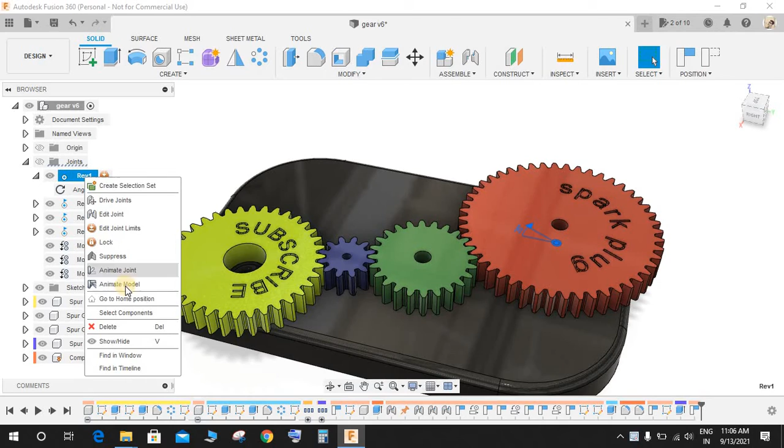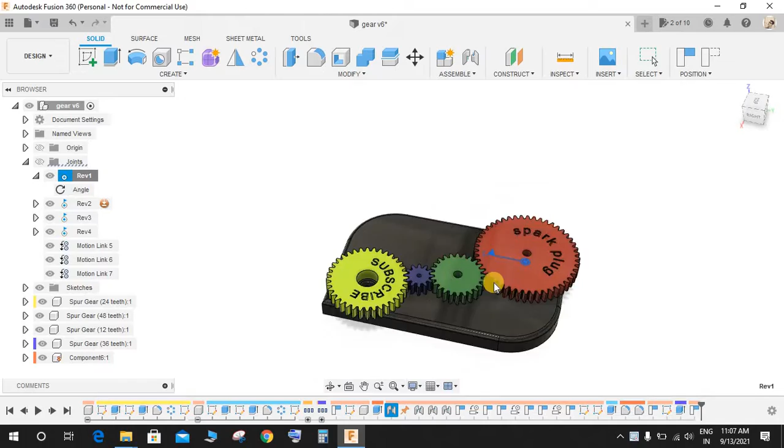So in this video tutorial I will be showing you how to make this beautiful gear train assembly in Fusion 360. This video is not going to take very long. I will be constructing these gears using scripts pre-installed with Fusion 360, and I will be showing you how to make this assembly and how to make joints between these gears so that they move beautifully without any intersection. As you can see, no two teeth are colliding with each other.

So everything is running beautifully. Let me just slowly show you. As you can see, everything is moving beautifully. Hope you will enjoy. Let's get started without wasting any time.

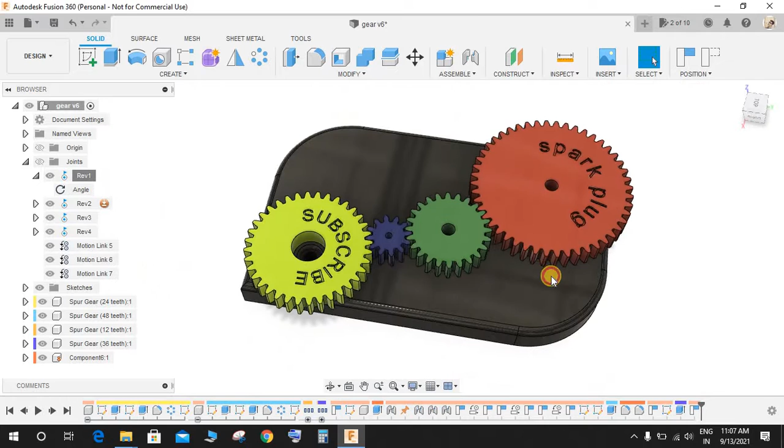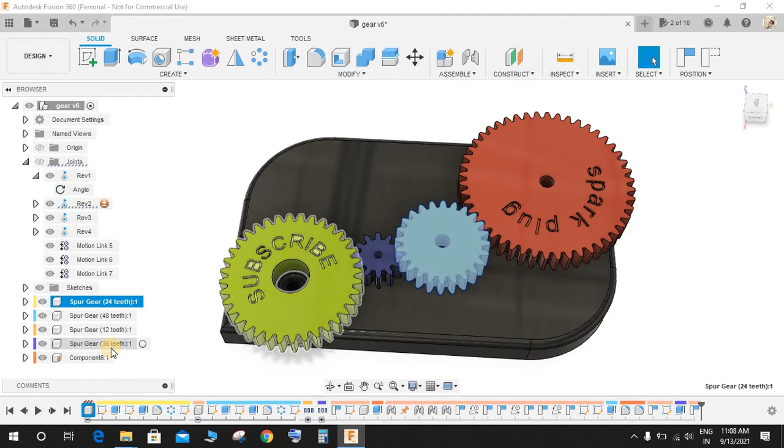Again, this is going to be a tips and tricks video, so I'm not considering any exact dimensions. I'm just showing you how to make a simple gear train and animate this assembly. I am going to create 4 gears: one with 48 teeth, a smaller one with half of it, 24, then 12, and one with 36 teeth. You can assemble any one after that, it doesn't matter. I will show you how to do this and the tricks beyond that.

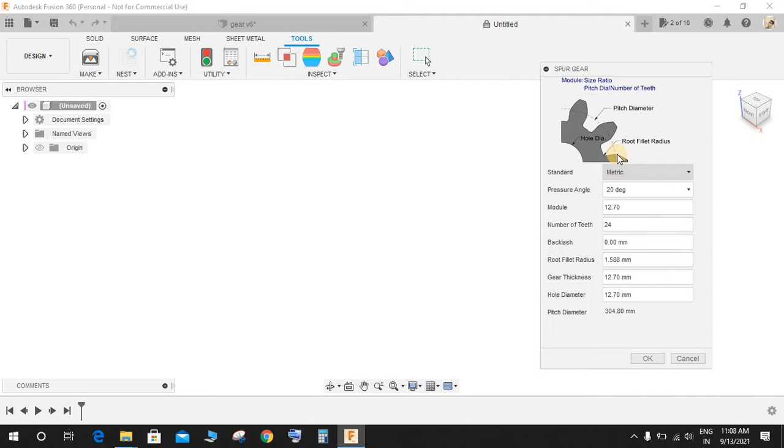So let's go to a new design and go to Tools, and here you have the option for Add-Ins, Scripts and Add-Ins. Click on that, scroll downwards, and we have an option for Spur Gear. Click on the yellow icon and click Run. Now it will ask you about the standard; remain in metric pitch. Here it represents the hole diameter, the root fillet radius and the pitch diameter. Always focus on your pitch diameter, as this is a necessary element when combining two gears and making an assembly.

The first gear I am going to make will have 48 teeth. Module is the ratio of pitch diameter divided by number of teeth. So we have pitch diameter, module and number of teeth here. The pitch diameter is number of teeth multiplied by module. I'm going to make the module 5, so the pitch diameter of the first gear is going to be 240 mm. The rest is okay.

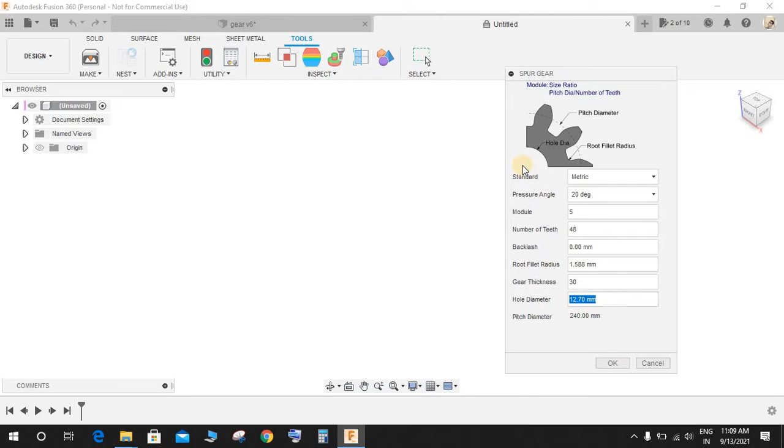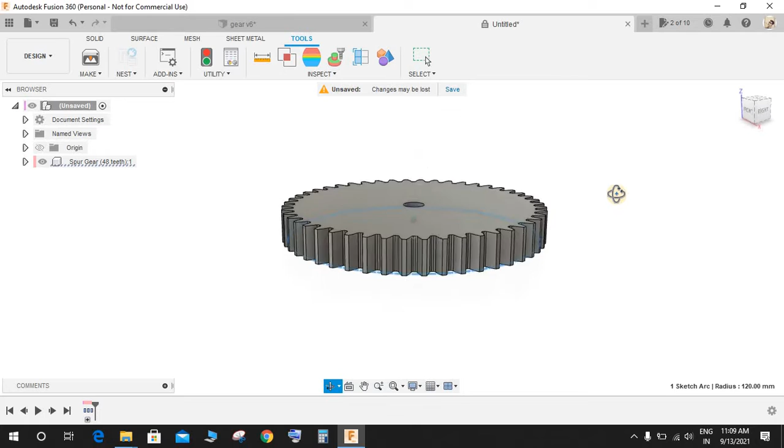Make the gear thickness 30 mm, and the hole diameter at the center, you don't have to do anything, but let's make it 20. Now we have a pitch diameter of 240 mm. Press OK and wait for your system to respond; it will take a few seconds to compute, and here is our gear. You can see the dotted line; if I measure it, the diameter is 240. This represents our pitch circle.

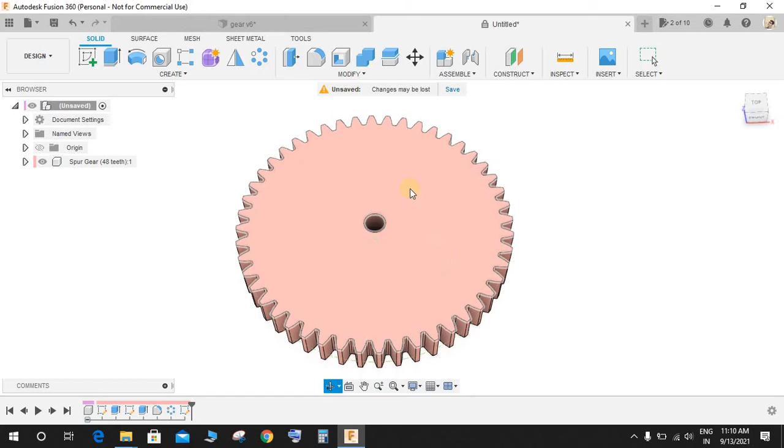Now let me press Shift and N to enable the component colors. If I go to history, you can see this is a pre-made gear but the history is there. You can edit the history anytime. Now I am going to repeat the same and make another gear of module 5, and this time the number of teeth will be 24. The rest will be the same.

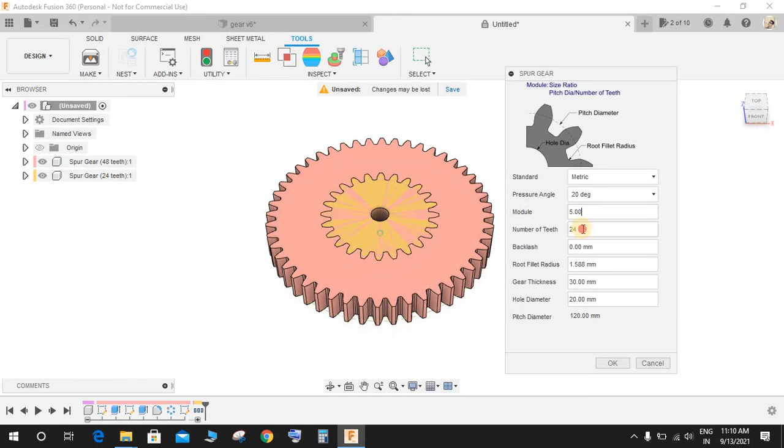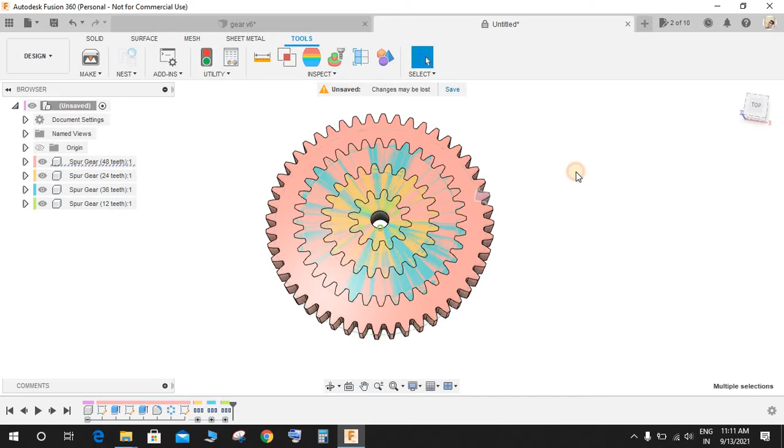Now repeat the same step again. This time the number of teeth will be 36. Press OK. Now we have our third gear. Again repeat the same step, run, and this time the number of teeth will be 12, and press OK. Now we have 4 different gears of different sizes. If I drag them, we have 1, 2, 3, and 4.

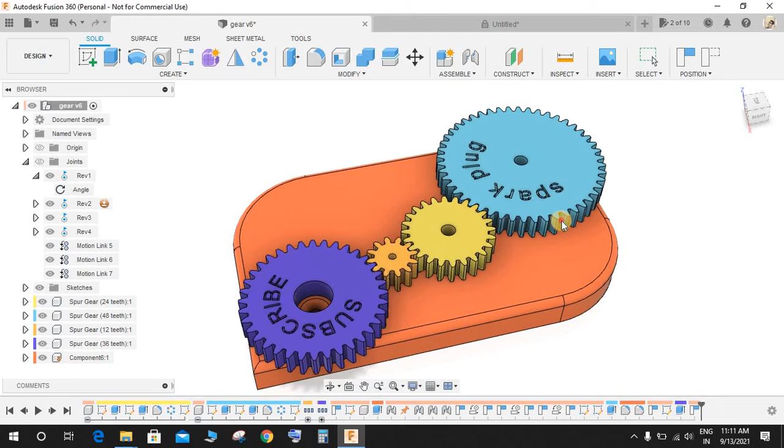Once done, I'm going to show you how to make this assembly. Before making any assembly, there needs to be a component that is grounded. The assembly cannot work unless the gears are mounted on something. So I have created this box here just to make it a grounded part, and each gear is assembled on this hole. You could use screws to assemble that, but Fusion 360 doesn't require that.

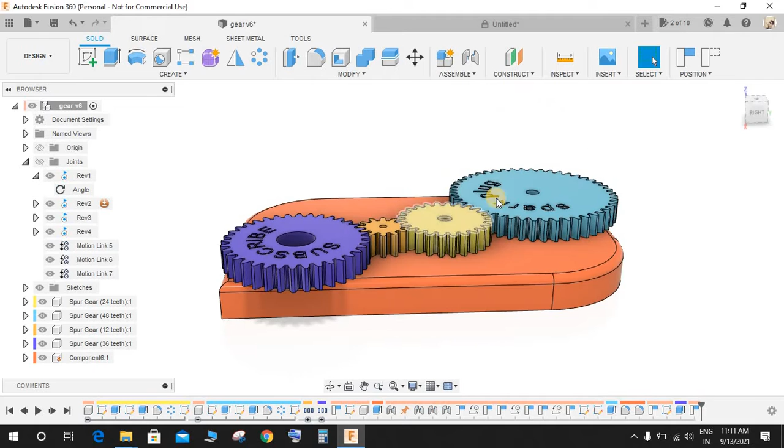So I'm just using these holes to locate the position of the gear on the table, and then I'm going to give the relation between each gear. So for that, now here comes the tricky part. Remember I told you to check out the pitch diameter of each circle.

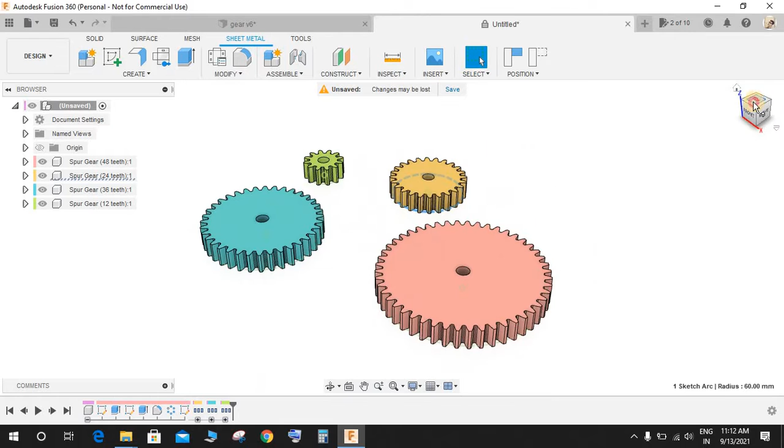Let's take the example of these two here. Suppose that I am going to make this gear move to assemble with this orange one. The center dimension between the center points of these two gears can be calculated by combining the radius of both pitch diameters.

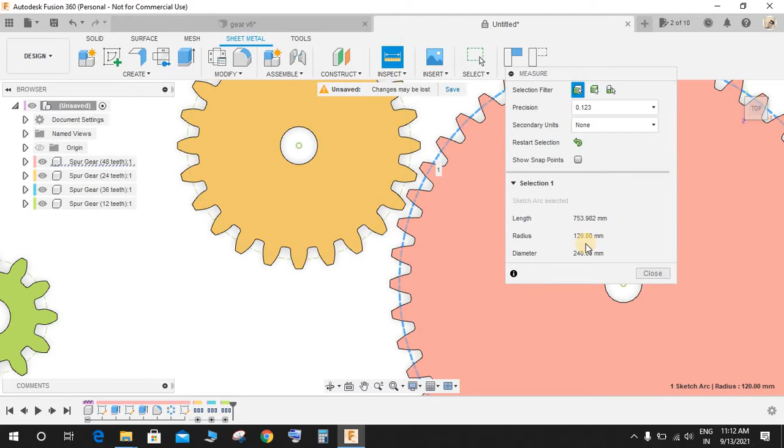For example, if I just click measure and select the pitch diameter, the radius is 60, dia is 120, so 60. And if I click on this one, the radius here is 120, so 60 plus 120 is 180. So the center distance from this point to this point, the minimum distance that is required to avoid the collision of the gears, is 180 mm. And similarly you can calculate the radius here also.

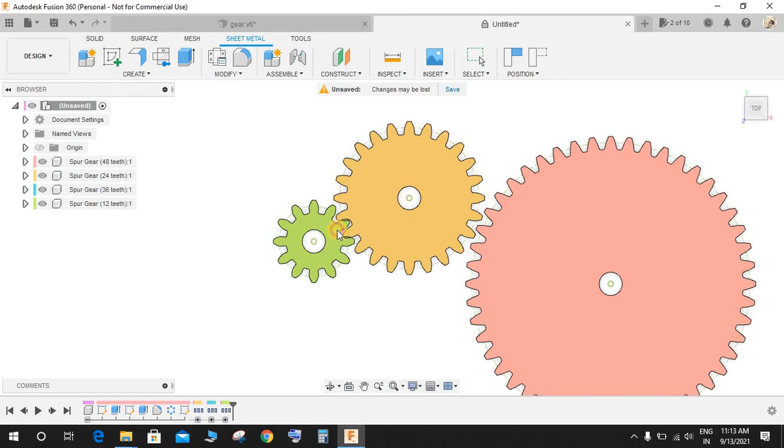So I'm going to click on create a sketch, and on the top plane or the bottom plane draw a rectangle, like this. Now I will draw a circle of any diameter, let's say 10. Okay, 10 seems very small, let's say 20, and I am going to make another one 20 mm here.

Now first I will be making this gear, and then we will be connecting this gear and this one and this one. So we will be moving in descending order, first the biggest one, then the smaller, then the smallest one. So first of all I'm going to connect this pink one with the blue one.

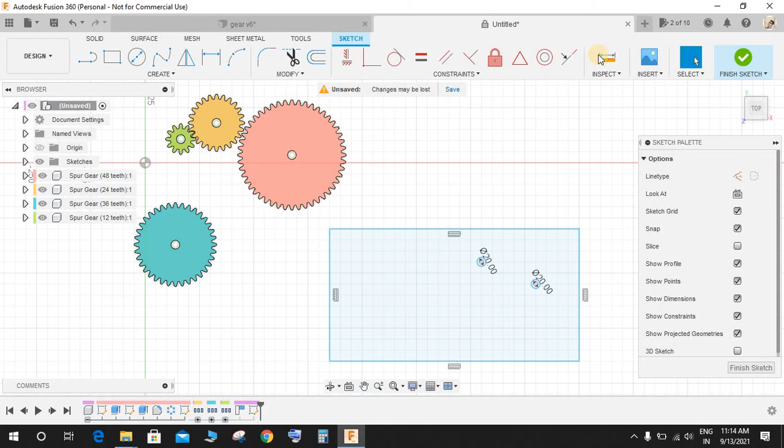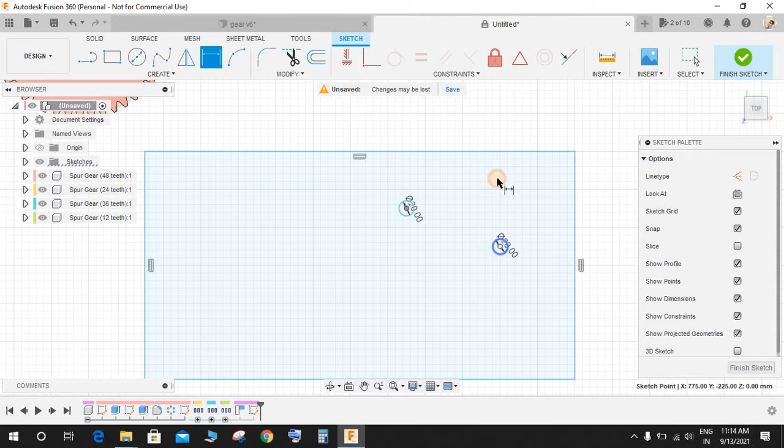If I just click on measure, you can see the radius of the pitch diameter is 120. And here it's 90. So 120 plus 90 is equal to 210. So press D for dimension and make the center distance between these two circles 210.

Once done, you can position it according to yourself. It is not necessary to position it in any way. So just fix this part like this. You can rotate it anywhere you want. Now we have calculated this one, and it's time for the yellow one. So again, draw a circle of 20 mm.

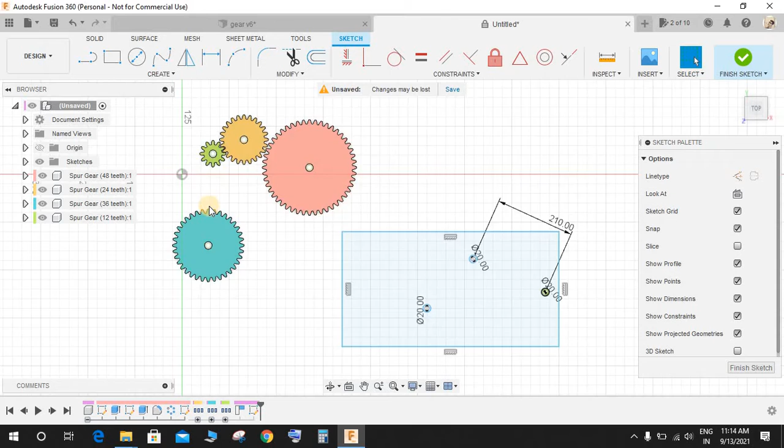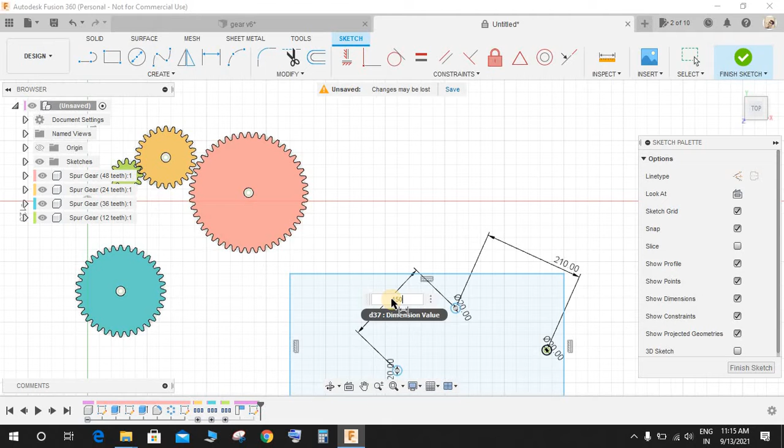If I just measure this, I forgot the radius. The radius was 90. And for the yellow one, the radius is 60. So 60 plus 90 is 150. So press D for dimension and make the distance between these two 150. Once done.

Now for the fourth one, we are going to do the same thing. This is 60 and this one is 30, so this is going to be 90. So press C for circle, make a circle and press D and make this dimension 90 mm.

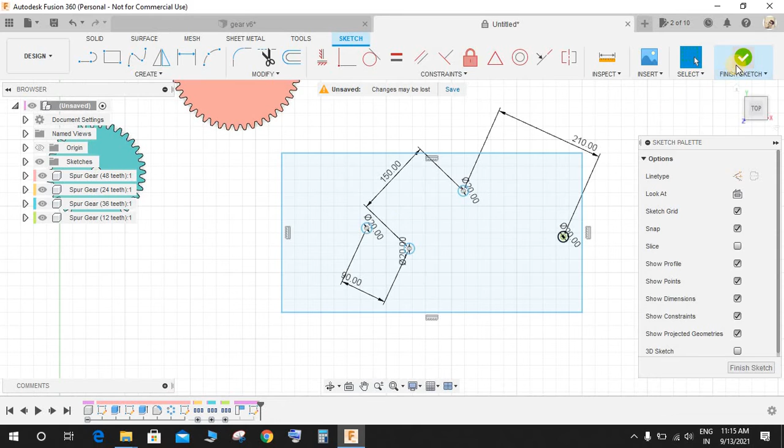Now once all your holes are okay, you may finish the sketch and extrude it. Go to solid, go to extrude and extrude it downward up to any distance, and this is going to be a new component. The dimension is not needed. We will be only using the holes here. So this is component 5. You can rename it as base.

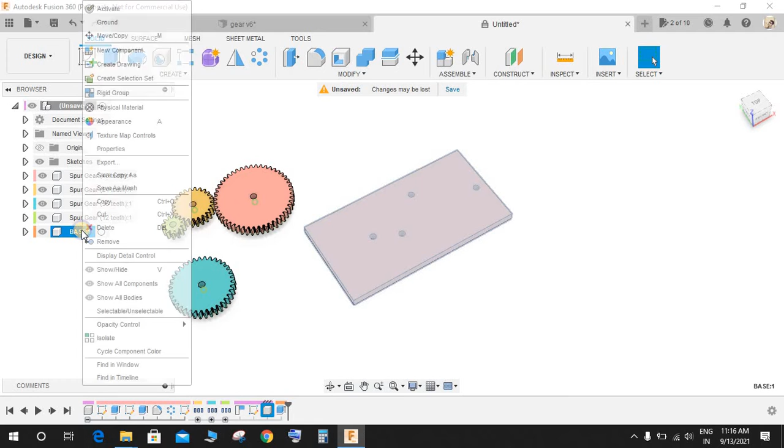Once done, right click on the base and go to ground. So we have grounded the component. That means in any way this cannot be moved. For example, I can drag this gear but I cannot drag this one. So this part is going to be the fixed one.

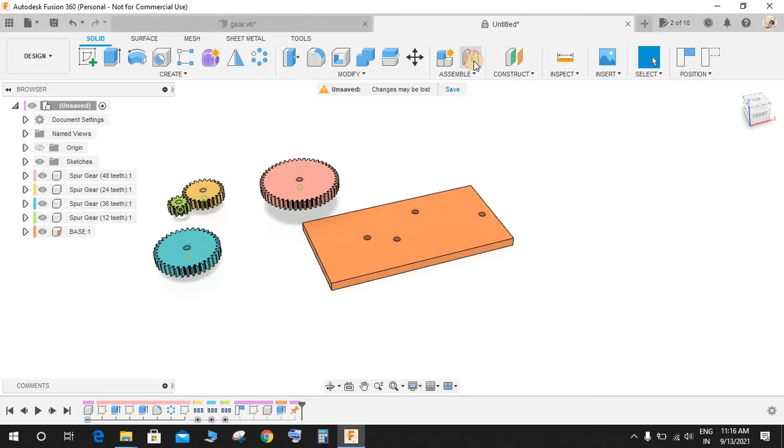So now I am going to place the pink one here, then the blue one here, then the yellow one here, and the green one here on their respective holes. So go to joints and it will ask you about the first component and to snap the first point. There are the simple, the between two faces, and the third one is the two edge intersection.

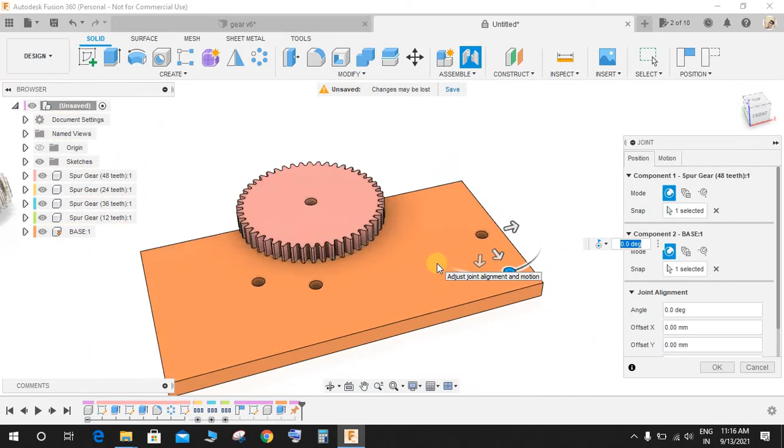So first of all, I'm going to select the first snapping point. Just snap the top portion of this circle, and this is going to be fit on this part. Now as you can see, it's downwards, so just click on flip and go to motion and select rotate.

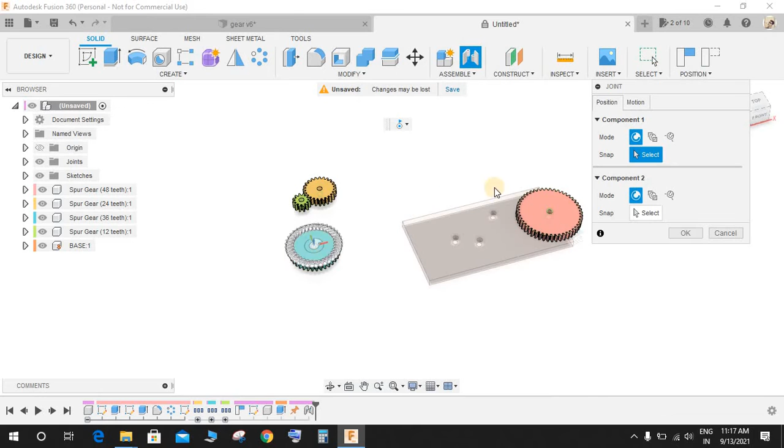Select the rotate and the Z axis, and you can animate it to see the motion and press OK. Now if I just move, you can see it is now rotating on its axis. Now similarly repeat the same step for the second largest gear, the blue one here, and just go downwards and flip it like this, as you guys can see.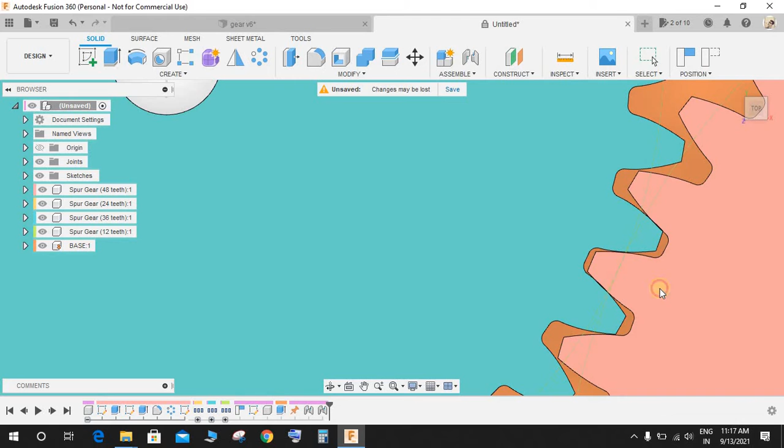And just to check that you have calculated the pitch circle accurately, you guys can see if I just drag the teeth here, it is moving without having any collision, and yeah, this position is perfect. Okay, one more point, just to avoid any more collision: I have not taken any tolerance here. I have just calculated the radius of this one and created the bridge between these two.

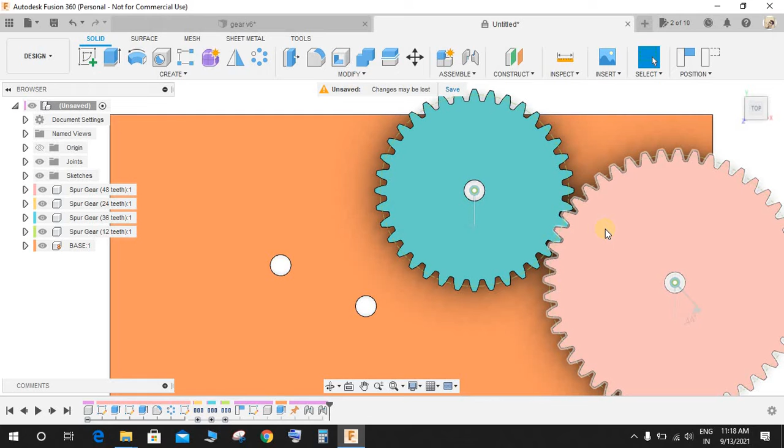If you don't want to have any extra collision and you want to make your design with accurate tolerance, suppose that the distance from this point to this point was 210, that was theoretical, but in actual you should be using 210.25 or 0.5. A 250 or 500 micron tolerance would be enough to ensure no collision between two gears. But for now, for the theoretical concept and for the basic view, this seems okay. Let me just drag it carefully here. Yeah, okay, they don't have any collision now.

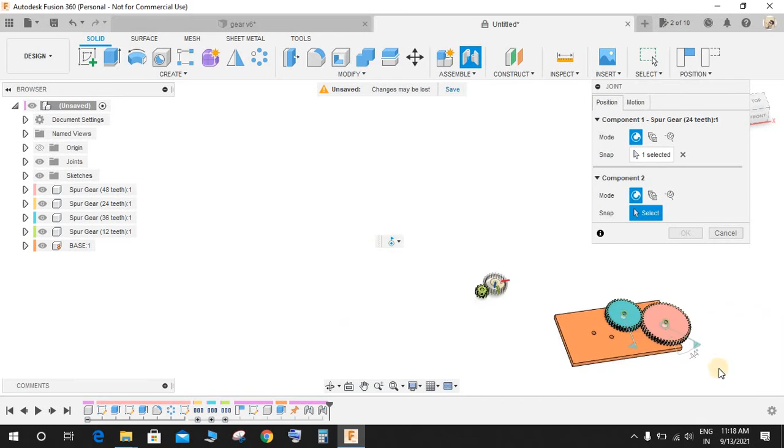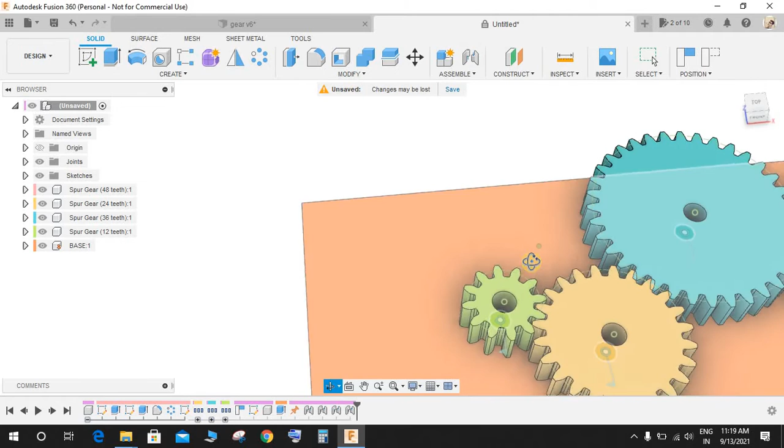Now repeat the same step for this one and here, and just go downwards and flip and okay, and repeat the same for the last one also. Select the center point and this one and flip it and okay. Now once done, what I'm going to do is go to top view and align each gear so that they don't collide with the teeth of another one.

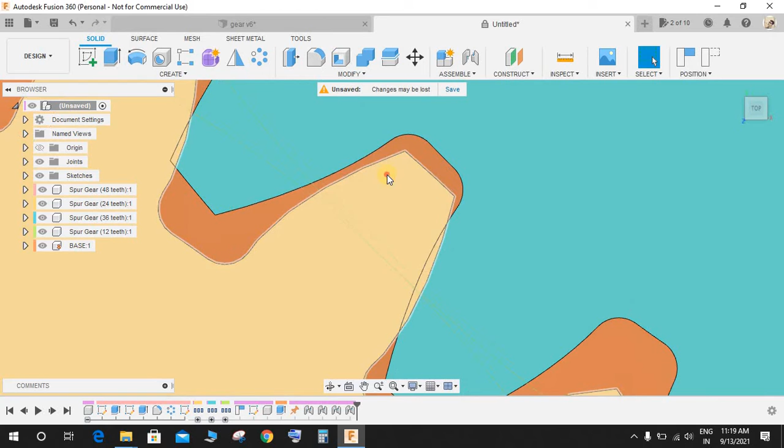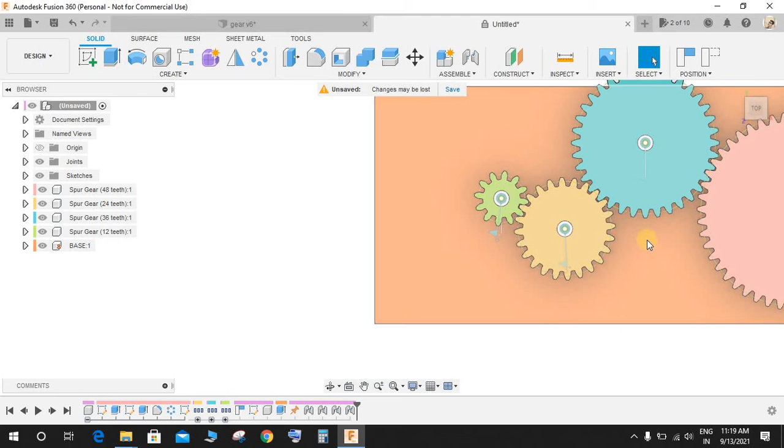For example, I have aligned this one also. Now it's time for the yellow one to align. So just drag the yellow one so that it doesn't collide with the teeth of the blue one. Okay, this seems okay. Now repeat the same for the green one here also. Rotate the green one, or any color that your Fusion 360 picked up, so that it doesn't collide with the gear. Now that we have every gear in their desired position, just click on capture position to capture the position.

Now I am going to link the gears between these two. We will start by making the smallest one. The smallest gear here is T12 and the second smallest is T24. So the number of teeth on the yellow one is 24 and the smaller one has 12 teeth. That is exactly the half. So the gear ratio is 24 divided by 12, that is 2:1, 2 times. That means if the yellow one rotates 360 degrees, the green one will rotate twice, about 720 degrees.

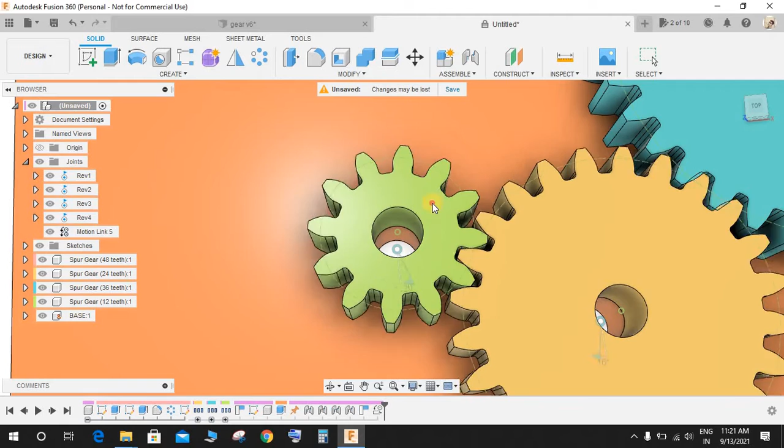Now once done, if I just drag the green one, the yellow one will automatically rotate. What I have given it is that a 180-degree rotation of the yellow one will rotate 360 degrees, exactly 2 times, so that they will have the exact actual gear-like movement. Now just revert back the position so that they get back to their original position.

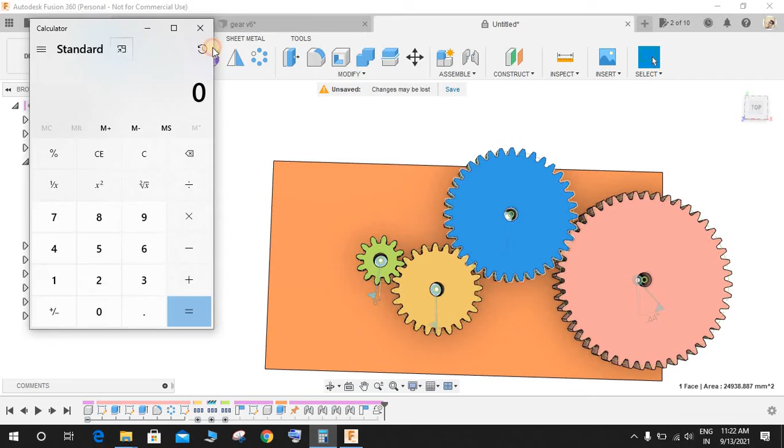Now the gear ratio of this: the number of teeth on the yellow one is 24, and on the bigger one is 36. So let me just open up the calculator, and the gear ratio this time is going to be 36 divided by 24.

So the gear ratio is 1.5. That means for any rotation the yellow makes, the blue will rotate 1.5 times less. So what I'm going to do is, the second revolution, the second represents the blue one. So go to Assemble, go to Motion Link, and we will be linking the second to the third.

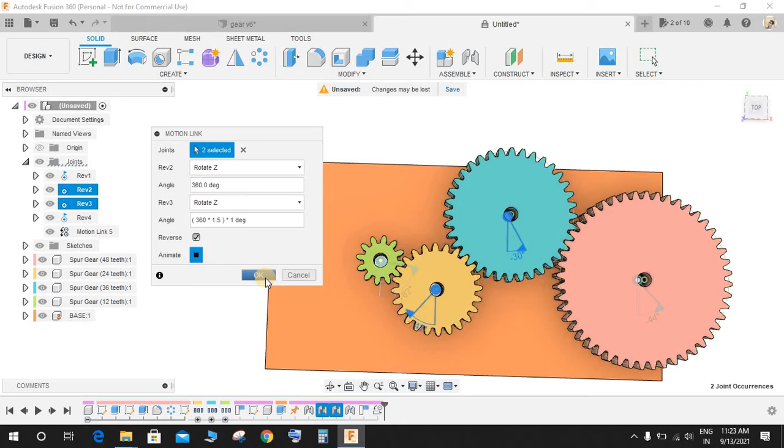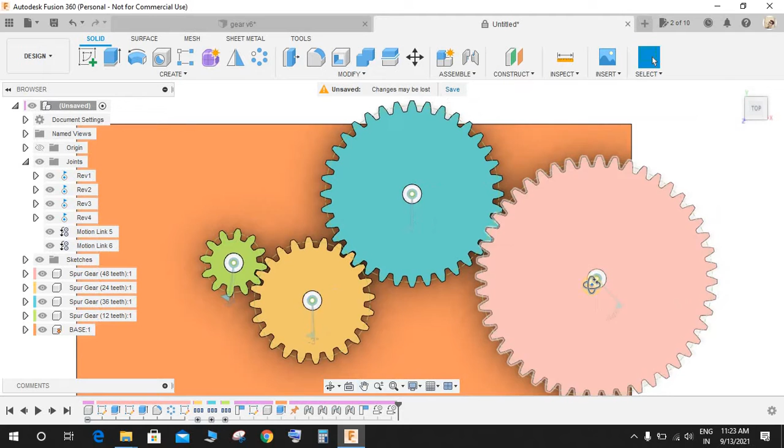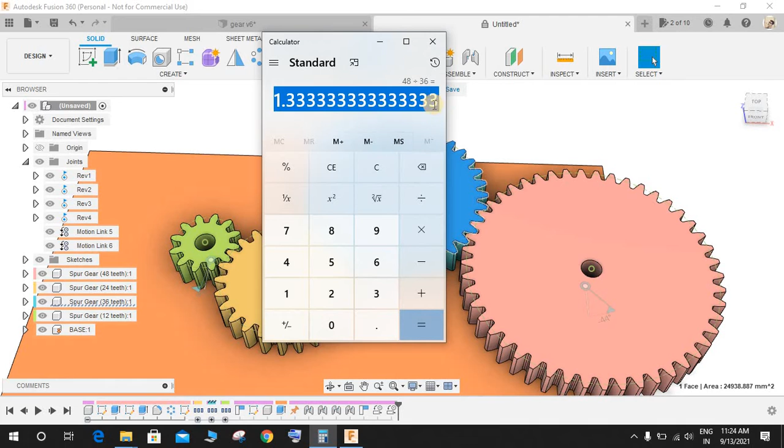So just revert the position for now. Again, repeat this same exact step for the third one also. Now again, this has 48 teeth, this has 36 teeth. So if I just open the calculator and divide 48 by 36, the ratio is 1.333333. So 1.3 is the ratio. So just copy it like this, and again go to Assemble, go to Motion Link, this time the one with the 2, and this time this is going to be 360 multiplied by, Control and paste.

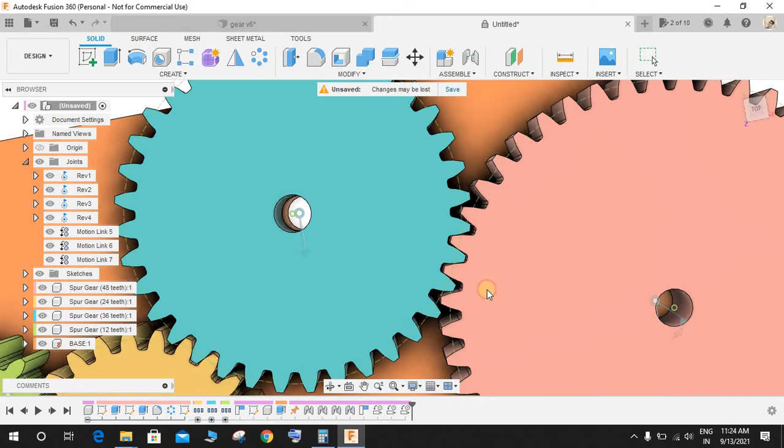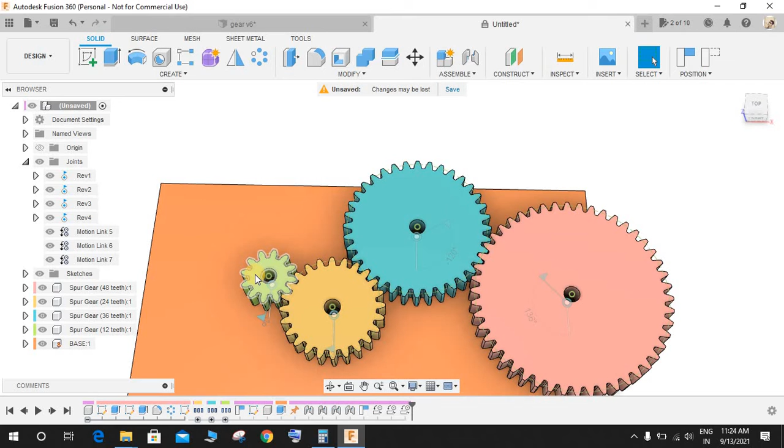So this video was to show you guys how to make a beautiful gear assembly, how to use the joints, and how to use the complexity of the joints here.

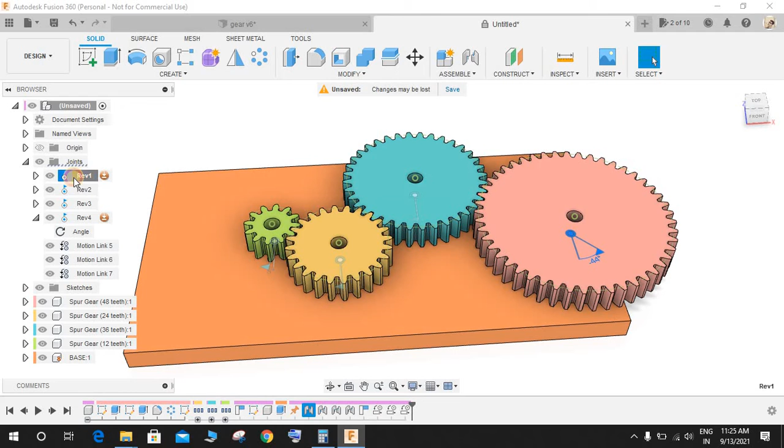And also let me just show you the motion study. So there are 2 ways to animate your system. For example, click on any revolution, right click on it and click Animate Model. It will automatically keep going till any key is pressed. So for example, this is revolution 1. This is around 48 degrees. So I'm going to make it 0 degrees and press OK. Now the revolution 1 angle is at 0 degrees.

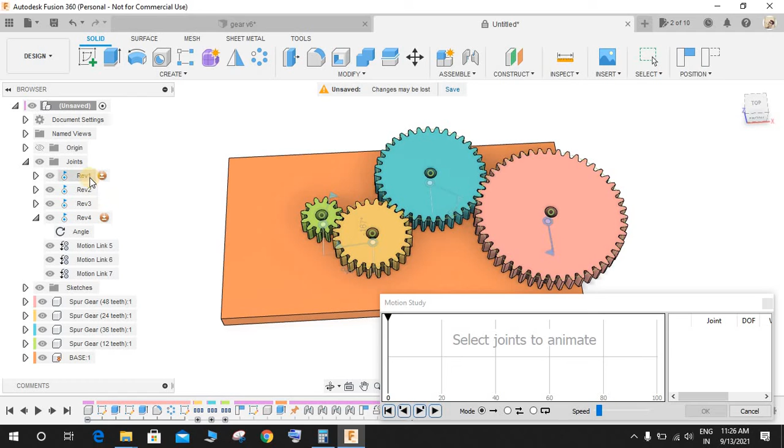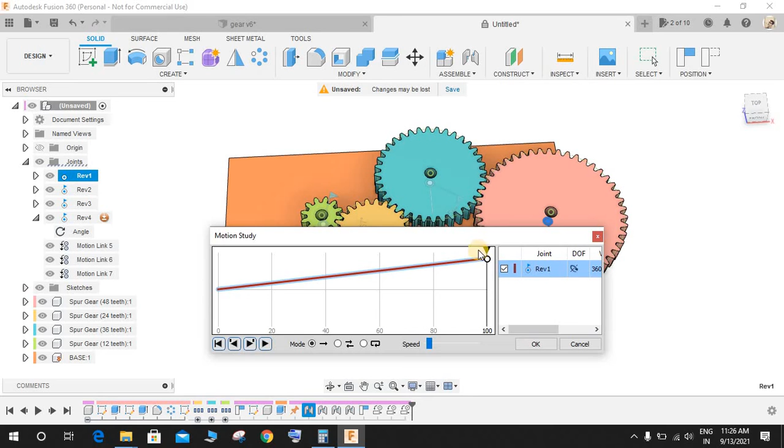Now I'm going to go to Assembly, go to Motion Study. I'm going to create a motion study. So select any joint. Let's say we have created revolution 1 at 0 degrees here. So select it. Now we have 100 points here to show at which point it goes. So at the 100th point, I'm going to tell it that it should be rotating 360 degrees and press Enter. Now from this point to this point, our pink gear will be rotating 360 degrees. This is basically a very simple motion study. This comes in handy when you are making very complex assemblies.

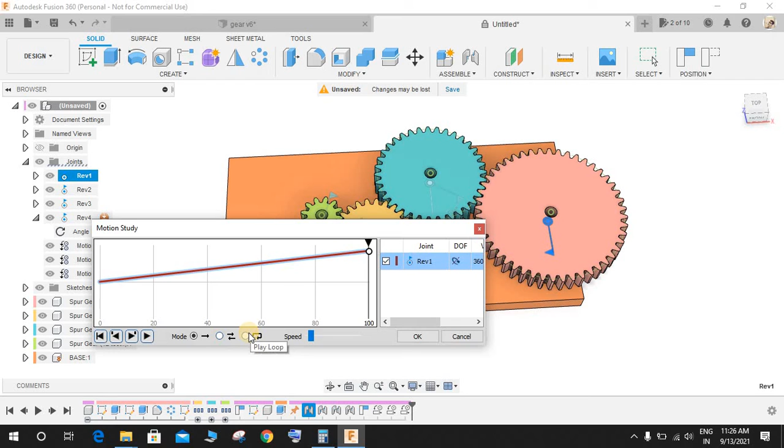So if I just press play, you guys can see that it's playing. And now there's an option called loop, play, and backward. So I'm going to make it a loop and just press OK, and it will keep on rotating, and you can increase the speed from here also.

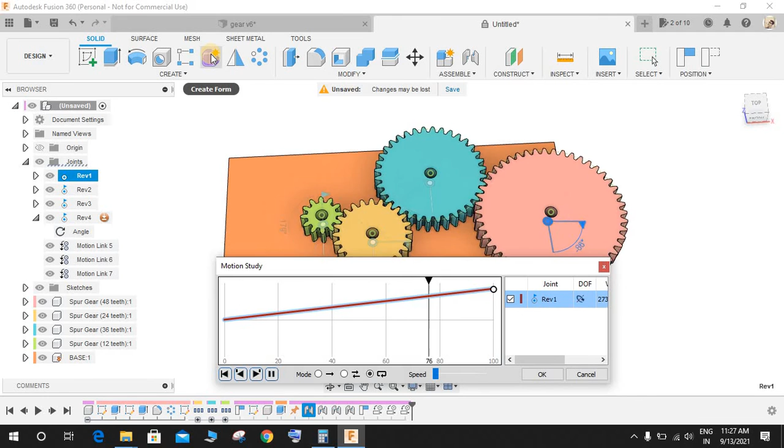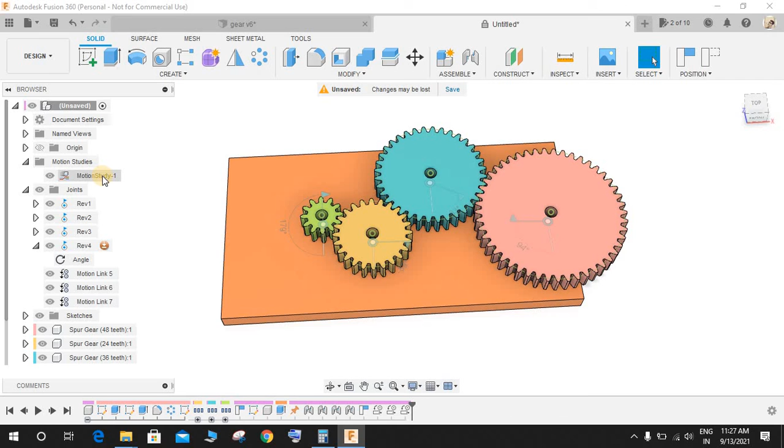And if you are not a free Fusion 360 user, like I am, I'm not using a commercial license here, I'm just using a personal license. So if you are using a paid license, you can animate and render your motion study by going to the rendering workspace. I have already created a video on that, you guys can check that out. Basically the motion study, if I just click OK, you have an option here. So this motion study can be rendered into a beautiful video. That is a paid feature, so you guys can check that out.